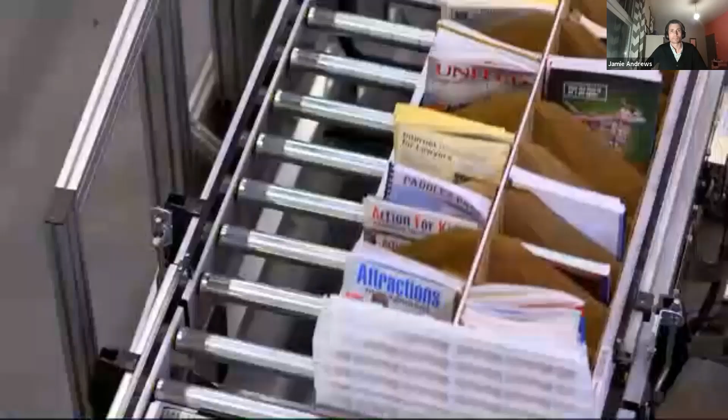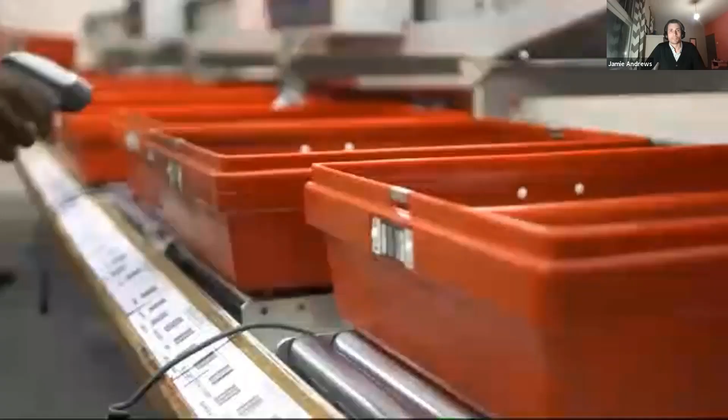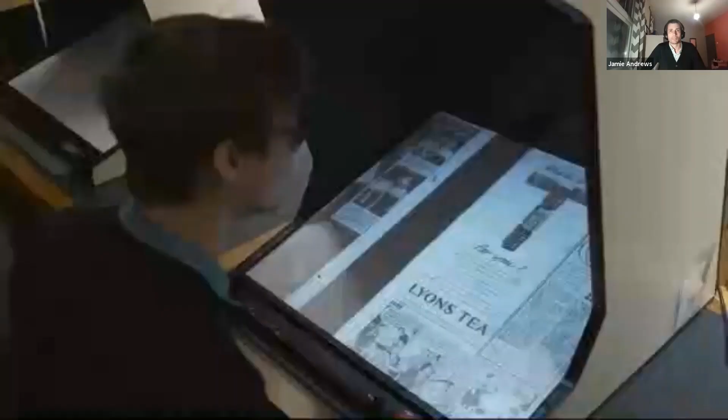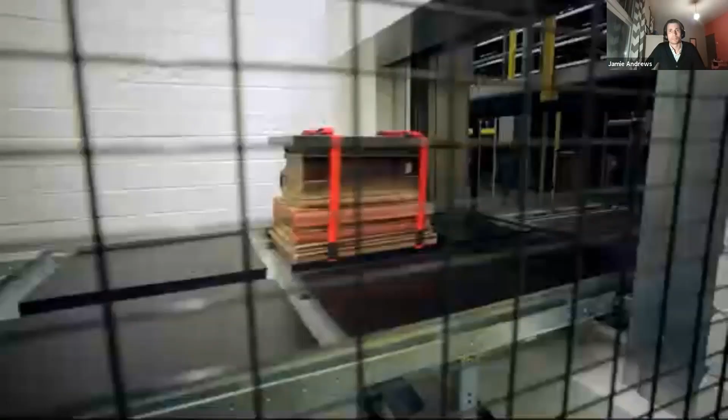Ladies and gentlemen. Ladies and gentlemen, it is a great pleasure to have this opportunity to address this very great and important gathering. I am glad you are enjoying yourself. There is an indefinable, mysterious power that pervades everything. Wonderful discovery in an age of discovery. Let it keep up my foreign language. Well, can you hear? What are they going to play? What are they going to play? What are they going to play? Play. What are they going to play? Isn't it marvelous? Isn't it marvelous? Isn't it marvelous?

The music there, by the way, was by DJ Yoda. It was an original track created from found audio recordings from the British Library Sound Archive, another collection stored at Boston Spa, 5 million recordings dating back to the early dawn of recorded sound, 1877, Thomas Edison's experiments. Everything from 1877 through to today's digital downloads is part of that national audio collection, again mostly stored at Boston Spa.

So that's what we look like, or at least what we will look like again when people are able to be back on our sites. Where did we come from?

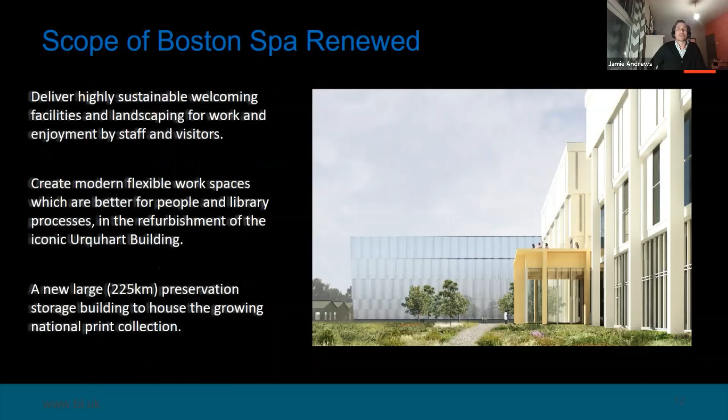But we are still, for the most part, in those original 1940s munitions factory buildings, which were built to be robust, but perhaps not fit for purpose for either people, whether that's our staff or our visitors, or for our collections nowadays. So we are, with a significant injection of funds from central government, working to refresh and renew that site, to make it more welcoming, more open to visitors, to make it a better workspace for our people, and to house that growing national collection that I've mentioned.

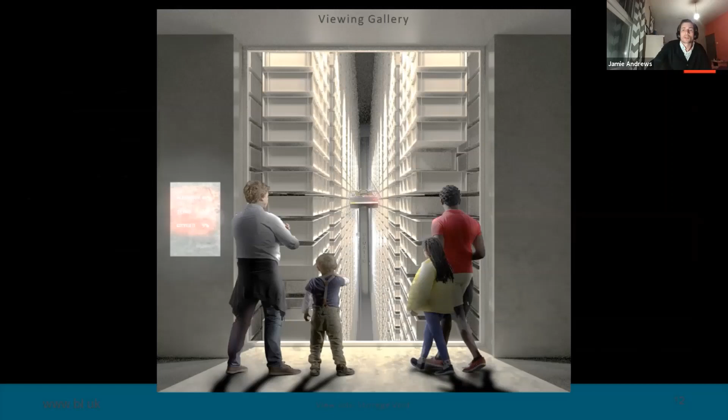As part of that refresh, there's an image there of how even the storage can become a visitor attraction itself. So I'm going to hand over to Rachel.

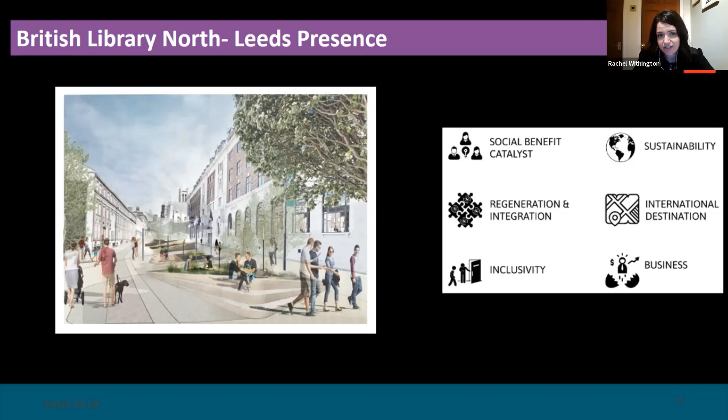And then it's really thinking, how do we translate that vision into a service proposition? I think that's been the main focus of what we've been doing over the last 12 months alongside our programming. This slide really is just to try and show the emerging thoughts of what we've been thinking about. So agnostic of any building, these are the kind of things we would want to do.

But I think given the iconic nature of Temple Works, it's very, very hard to think about a service offer without the building shaping and informing what we might want to do. So the history of the building, which David will obviously detail much better than I ever could in a few moments, it was so innovative for its time, and we want to ensure that that innovation is reflected in whatever we might do.

Multifunctional exhibition and event space, which would enable showcase scale exhibitions, from showcasing of physical treasures to large scale digital exhibitions. Innovation space is the one that I think it doesn't say what it does on the tin.

So what we're trying to do here is build on and complement our regional BIPC offer, supporting businesses through incubation, co-working space, makerspace, so that we can offer support to entrepreneurs at every single stage of their journey, but not only entrepreneurs, support innovation at any stage and from anyone.

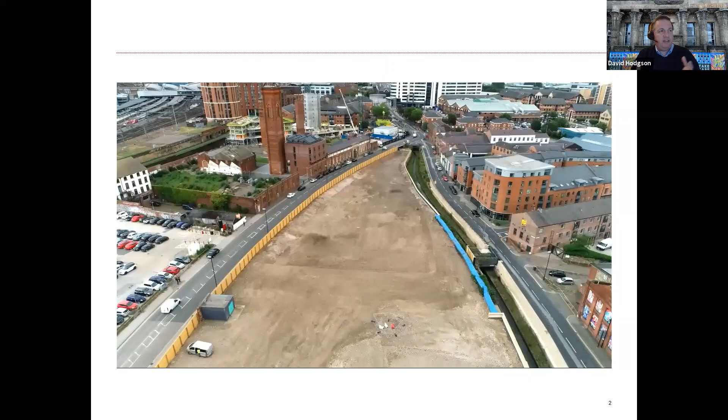So what I wanted to show was the context of Temple within the city centre, and this idea that when we acquired it, we always knew and thought of this location as part of the city centre, but over the years it had been cut off by various mainly transport-based infrastructure, the canal there, the railway, of course, the river, and this place, this side of the station, with everybody leaving the station going to the north of the city had really grown, and this had become sort of forgotten.

So in the front there you see Tower Works, iconic 3 Italianate towers, and behind it Granary Wharf, and then Mustard Wharf that is now coming forward.

This is the counting house. We know the counting house is the building at the front of Temple, and is actually structurally in the best condition. There in the foreground is the former sheep lift, and we'll come to that and explain a bit more about that. And then on the right there is Draper's Yard, or the 1953 building as it was named, and in front of us is 20 Sweet Street.

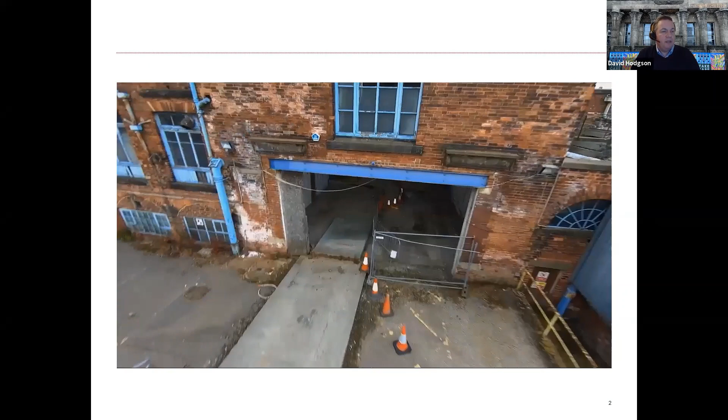I'll hold on to something fixed at this moment as the drone does this, but it flies over that iconic roof that everybody knows, and then we come down into the building. And as you come into the building, you really gain a feel for the kind of scale of what we're talking about here. The quality of the natural light is unrivaled even in modern buildings.

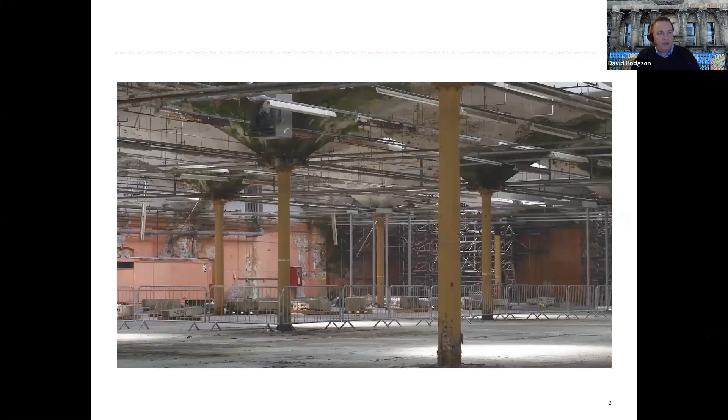That's through these kind of 66 conical glass structures that sit on the roof. And then you can see these columns, obviously far too slender, and we'll come on to why that's causing us a problem. And then you can see there in the foreground some scaffolding around some of the yokes on the building, and then some extensive scaffolding towards the rear. What you can't see is the absolute bird's nest of scaffolding at the front of the building that's holding up the area that collapsed, and we'll come on to why that collapsed.

Going back through the history, that's kind of a setting of the location. That gives you a real feel that sometimes you don't get on the ground as to how close this site and this building is to the station, which I think most people view as the heart of the city centre. One of the reasons why you don't really get that feeling is the complicated route through.

You can walk out of the southern entrance of the train station, put yourself down into Granary Wharf, and it's still not kind of an intuitive, navigable system about how you get through to this area. Part of the charm of the area is if you walk around Round Foundry, you're walking into little squares through cut-throughs and ginnels, and then out into another square, and that's going to be replicated through Tower Works with those towers and the development going on around it.

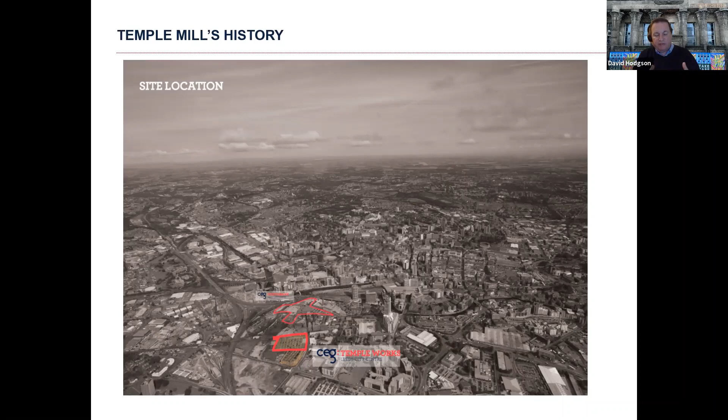We're trying to strike a real balance here on the wider area as to how you can get a real feel for it. It's going to be easy to get to Temple. However, at the same time, we want to contain and retain that element of surprise, and that's what makes this area so special.

Going back through the Temple Works timeline, you can see it was built in 1838 to 1841, designed actually by an engineer called James Combe, and we'll come on to why that was so important. And Joseph Bonomi, who's an Italian architect I believe, worked together on designing it.

Joseph was brought in at the last minute because, surprise, surprise, and apologies, I know there's some engineers on this call - the engineer's design, whilst functional, didn't have that kind of flamboyance that John Marshall was seeking for his new flax mill.

It's the flax mill, and then it moved into the 1930s when that iconic roof was lost in place of a flat roof, and then it was used for the war effort. There's an air raid shelter in the basement, and there was because it was this 80,000 square foot main room with the natural light.

It was used during that time, and then it becomes the Kays catalogue, which a lot of people around Leeds know it as, and that's when the 1953 building was built adjacent to it. Then it traded again to SJS Property Development, which was the Barclay brothers, and then we had the partial collapse in 2008.

And then it's been kind of used for a myriad of different uses. There's been different options to purchase given over the site, and a few false dawns as to its coming back into use.

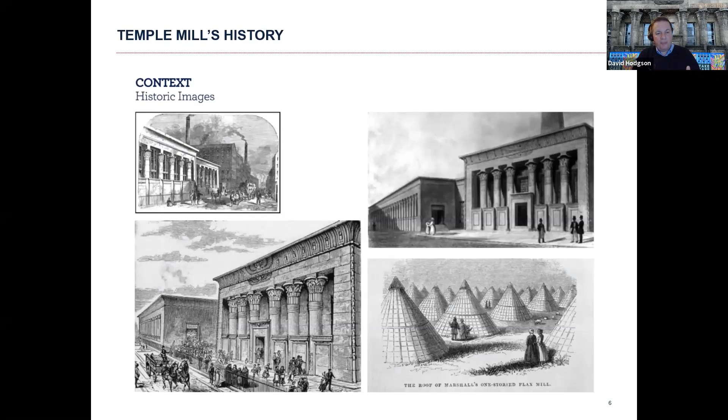We'll come on to how there was a hydraulic lift that was invented to get the sheep onto the roof to graze and look after that grass. The reason they did that was to retain the moisture in the main building - they wanted to get that because that makes the flax much more easy to work with.

What that meant, of course, is that you had engines that had to drive the machinery on the main floor. They were located down in the basement to keep out of that moisture. That was one of the first instances of an engine in the basement driving the machinery on the main floor, with the environment effectively being controlled by what was on the roof. And that has been a recurring theme.

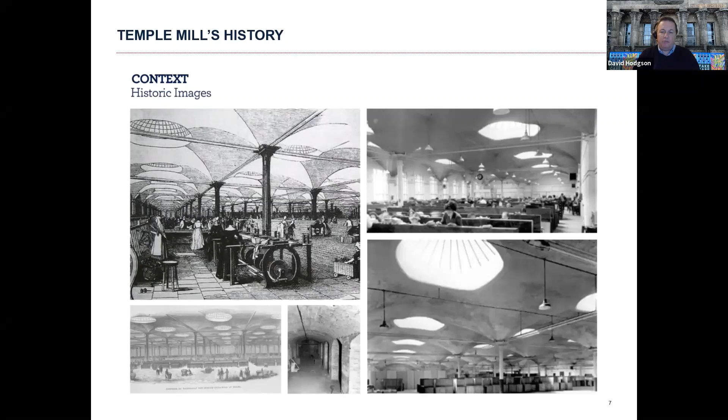We've taken that and thought, well, how can we replace that or reflect that in the modern interpretation of it? But again, you can see the quality of the space and the quality of the natural lighting just gives rise to a number of uses.

I thought the other interesting fact about the history was John Marshall originally started out on his industrial buildings, where he started out on Globe Road, Water Lane there to the north, in 1796, 1791, with warehouses, and then gradually built it along Marshall Street.

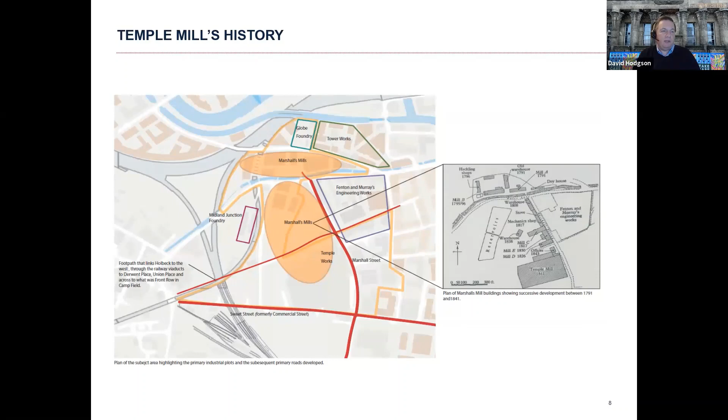That reflection of starting near what would be obviously a very small city centre at that time and working its way southwards to Temple Mill is something that we are again kind of replicating in bringing the area back to life.

Again, some iconic shots of the building - those conical glass structures that sit on the roof, and then the counting house with its Egyptian frontage, modelled on the Temple of Edfu in Egypt, and then Marshall Mill sat alongside it, which has been back in use as a managed office space for some time.

So we've talked a lot about the structural failure of this building, and I think it's well known that unfortunately, just after we acquired the site, we had to prevent access into the building because of major structural failure on the front. More than that, the nature of that failure gives rise to a situation where it's almost impossible to predict when it will go again.

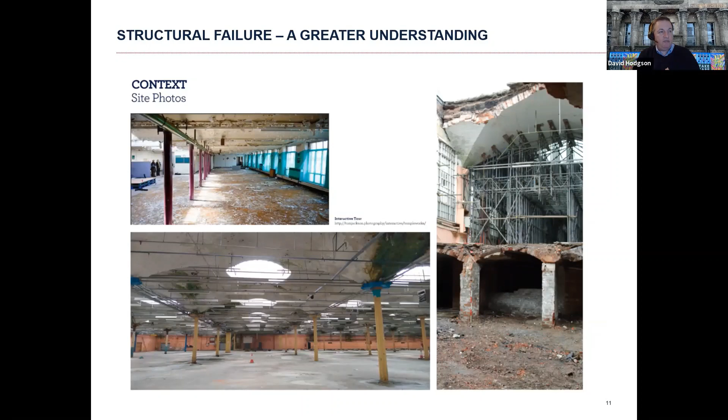We've done our best to shore it up in the short term, but I'll come on to what our plans are going forward. You can see the area of collapse on the front - that's the frontage, with large windows fronting onto Marshall Street. The photo top left is the pavilion, which runs east-west behind the counting house and alongside the main room. That's a two-storey building which we're intending to bring back to life and put a pavilion on top to overlook the roof.

Some examples of where the problem lies. Top left you see the roof structure - that's a cross-section where the collapse happened, but you can see that archway structure. That was the original structural solution to the building.

The intention was the water would land on the building, then run down those angles to the bottom, and then through the 84 cast iron columns that sit in the main room. They were hollow, and it would dissipate into the ground.

In 1930, that roof structure was lost, and they made a flat roof by basically loading it with bricks and clinker into the gaps, and then layers of tarmacadam and concrete on top. That's led to a huge and significant increase in the weight loading on the roof.

We're now about £3.5 to £4 million into understanding this building through surveys. We know more about this building, I would suggest, than the guys that built it. We've come to the conclusion it's pretty much down to that loading on the roof that's causing all the problems elsewhere - you can see the yokes on top of those columns, and one on the right-hand side that's snapped. So that's the issue: a lot of weight being applied onto the building.

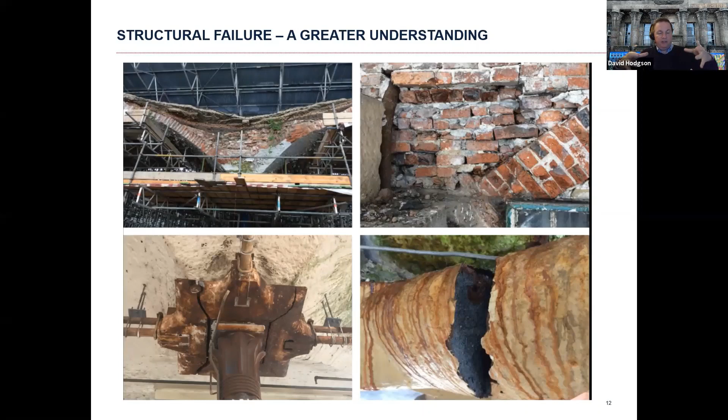We've got cast iron brittle yokes and a tie bar system that run around the building. The tie bars coming out of the four sides of that yoke then connect to another one, and two tie bars run around the perimeter of the building. So you can imagine all the pressure on the building is forcing it outwards, and these tie bars are holding it in at the perimeter.

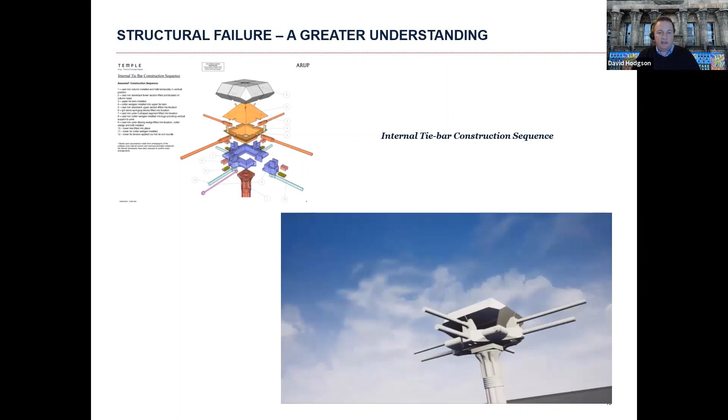So this is an animation of how those yokes fit together. We believe there was only one tie bar system in the original construction, however it collapsed twice during construction, and one of the remedies was to introduce a second tie bar system on the yokes to provide greater stability. That came slightly after the initial one, but you can see the level of design and engineering that went into just one of those yokes.

In 2008, there's a well-documented collapse. A lot of people looking at it, like us when we first started, felt that the building collapsed inwards. I think we spent a lot of time trying to understand how it collapsed inwards when all the force is outwards.

We found some old historical photographs of Marshall Street after the collapse, and the conclusion we've come to, as you can see on that model, is that one of the two perimeter tie bars gave way at the frontage. It was over a long-term freeze-thaw action, not that particular night - a lot of people were under the misapprehension it was freezing cold that night, but it wasn't.

And what happened is there was so much force in the building with the extra weight on the roof that this catapulted part of the facade across Marshall Street, and then the tie bar around the outside caught it and pulled it back inwards. So that's why it looks like it collapsed inwards, but in actual fact the first projection was outwards.

Which is why if you go down there now, there's green nets on the outside of the building at the top of the columns, and that's in the instance of a further collapse - that reflects the fact that the first act of force will be outwards.

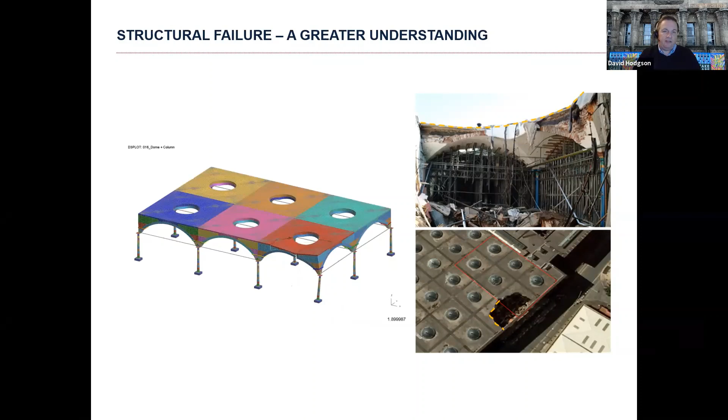That's to capture those bits on the top of the column should that occur. And that's a bit more understanding of the 2008 collapse. So the lower yoke fractured, and it all happened obviously simultaneously - there's a sudden release of this elastic tie, projectile masonry flung across Marshall Street, and then it all collapsed back inwards on itself.

We've modelled that. We've got a much greater understanding now of why that happened, and that's led to a lot of our conclusions. Because we haven't been able to get into the building, we've had to do a lot of this work through drone footage, through robots - Arup and Christian Surveying have both worked together to build robots that go into the building. We've got hours and hours of drone footage on the outside of the building, and we've got sensors set up all around the building that monitor even the slightest of movement.

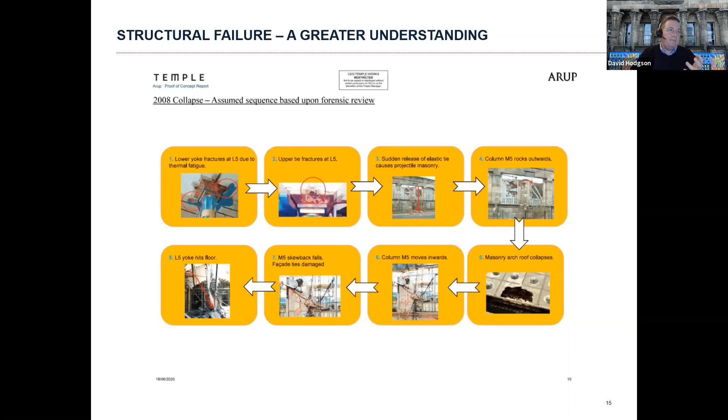And there's a statistic - we've now got over a year's worth of data. This building is moving around 25 millimeters every 24 hours, give or take on average, which it can only stomach for a limited period of time because of that brittle nature of the tie bar system. So it's doing it at the moment, and that's the biggest failing I think of this building - it's not the design, it's the materials that were made available to them at the time.

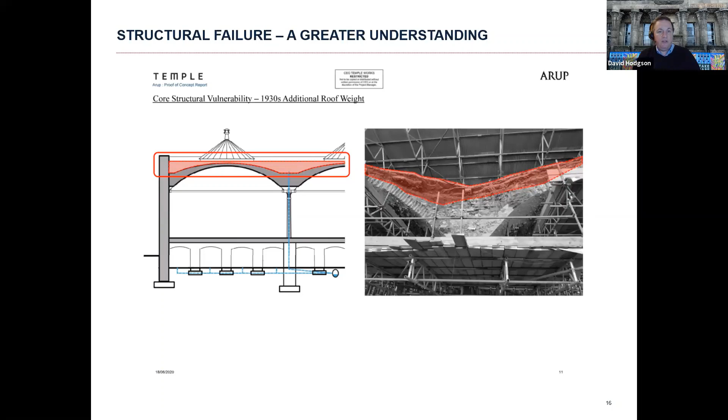So I've got a couple of slides here just to flick through the main issues. As I say, one of the biggest things is this core structural vulnerability given the 1930s additional weight on the roof, and you can see there again that cross section of where that weight's coming from.

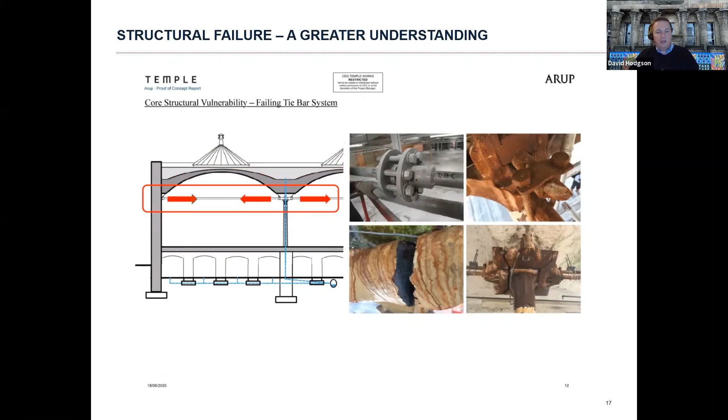This then gives rise to a failing tie bar system - it's this brittle material. Again, there's a couple more examples there of where it's just sheared, and that's putting forces in all directions. And what's very difficult with this building is that should one tie bar go or one yoke go internally, the building can to a certain degree stomach that. What we can't predict is which way the force will then redirect itself. So hence we've got temporary structural works being designed.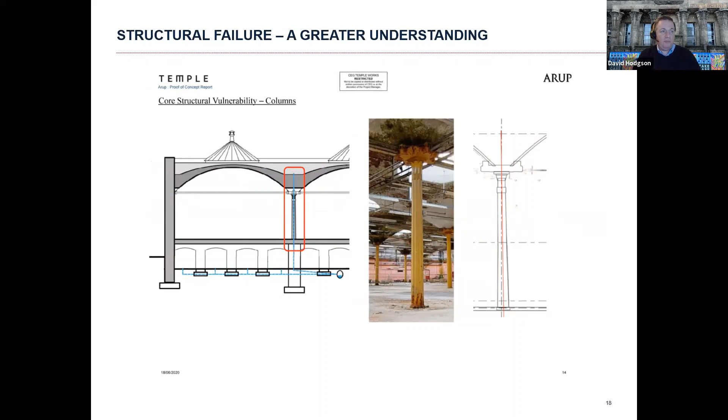These columns, as I mentioned, are very narrow. They used to have water running through the middle of them, so there's obviously corrosion from the inside of these columns as well. And then all of this is giving rise to a lot of pressure on the perimeter walls.

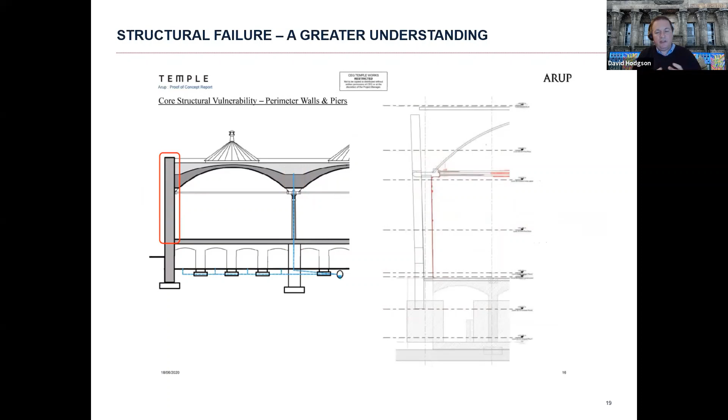And the other big issue that we've got is we can see the yokes in the middle of the building. Where we can't see the yokes are where they're set into the perimeter walls. And there's, I'm not sure, 18, 20, I think, of these yokes sat in the perimeter wall that we need to get access into the building to do, which we can't because of the stability issues. So that's the reason why we're having to pick our way through the building very slowly.

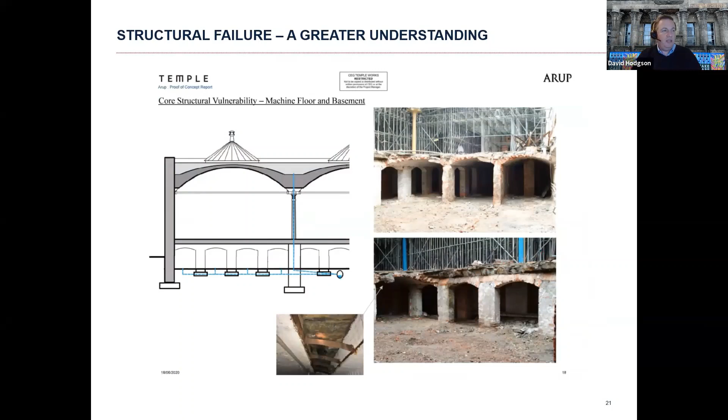And then you've got a basement that's actually larger than the main mill, runs through under the entire building and further than that. And that again is built on poor foundations, poor quality ground.

So given all that information, we pulled together an option analysis of where we thought the best option was, and you can see there's various different solutions for dealing with the structural issues - through an exoskeleton, through an internal skeleton, through buttressing, through a whole variety of things. And one thing we've got to always bear in mind is the grade 1 listed status of this building is in part reflective of that quality of the main mill and the light and the space, and we want to retain that wherever possible.

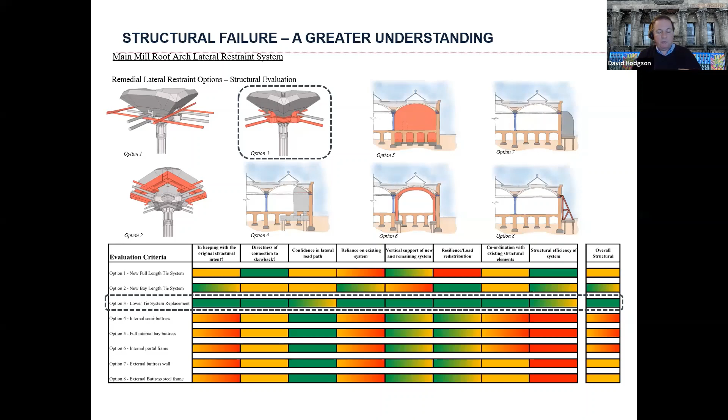So in all honesty, three or four years of work later, £3 or £4 million spent, and we've come to the conclusion that what Marshall did 200 years ago was probably right. But what he didn't have, as I say, was the right materials and the right construction techniques available to him at the time.

So our solution is really a kind of lower tie bar replacement with modern materials that flex and move and reflect the nature of the building. Now, we can't get in to finally establish that until we've done a lot of what we're calling temporary stabilisation works, which we're hoping to start on site towards the end of this year.

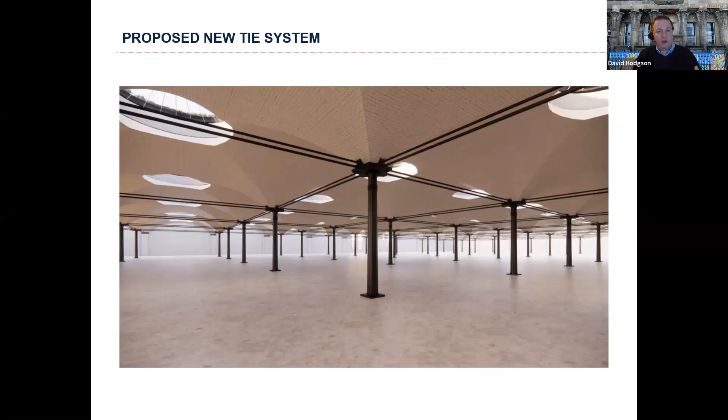There's a year's worth of work there, and it's pretty much not much more than extensive scaffolding internally. However, it has to be done sequentially. You can't start in four corners and work your way to the middle. You have to work through bay by bay, which is why it'll take time. But we're hoping that having done that, we can recreate the space in the building.

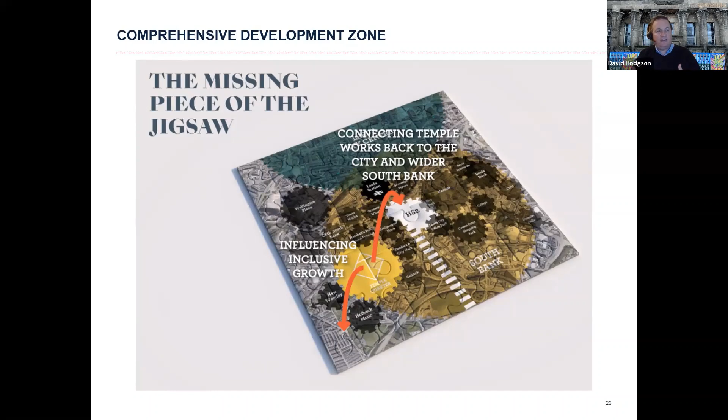So on a wider aspect, the other reason for acquiring Temple is we've worked very closely with Leeds since acquisition to really see how we can make Temple not just the centrepiece for this area of the city centre, but how we can then take it further and really influence inclusive growth through the communities that have been cut off through the M621 delivery.

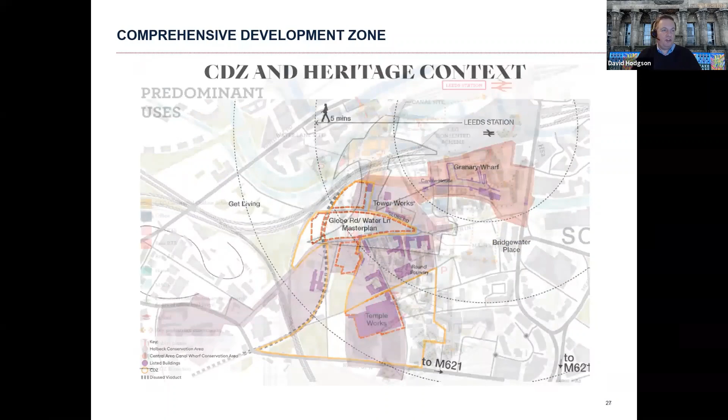So this kind of physical connections back, but also social and economic connections back into the city centre, and how we can use this building and obviously British Library's interest and hopeful future occupancy as a real catalyst to make that happen. So this is just one example of hundreds of exercises that we've done to build up a much greater understanding of the area, how people and traffic and community and everybody else use the area, how they could use the area going forward, what the constraints are, what the opportunities are. And then we've kind of developed a master plan off the back of that.

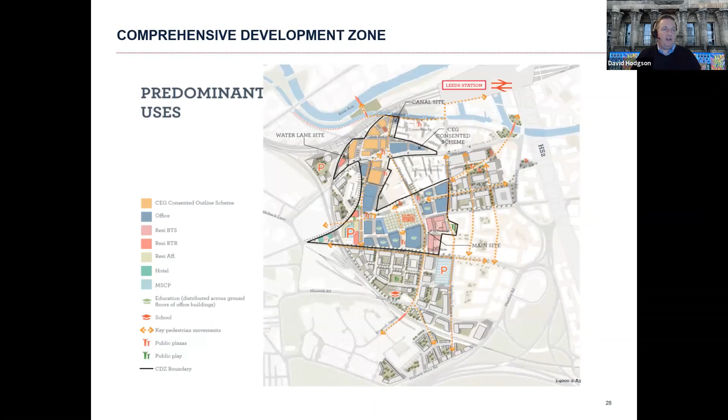That's just really a massing exercise. That doesn't really reflect anything. But we've got an opportunity here for around 3 to 4 million square foot of development that really puts the Temple works as the centrepiece.

And then we've started, as I said at the beginning, really looking at, do we create massive vistas down to Temple? Do we create a series of linked squares and public realm? Or probably the answer, do we do a mixture of all things? And how do we access and make this building much more accessible on all sides?

So these are some of the ideas we've got put into CGIs. Again, these are just very in-principle ideas. I think Leeds have always seen the space outside Temple as public realm, setting a high quality environment to really understand and appreciate that building. And then with development around it, creating new linkways, creating new ground floor uses, new activity, and really kind of this being a new target for the wider area of the city.

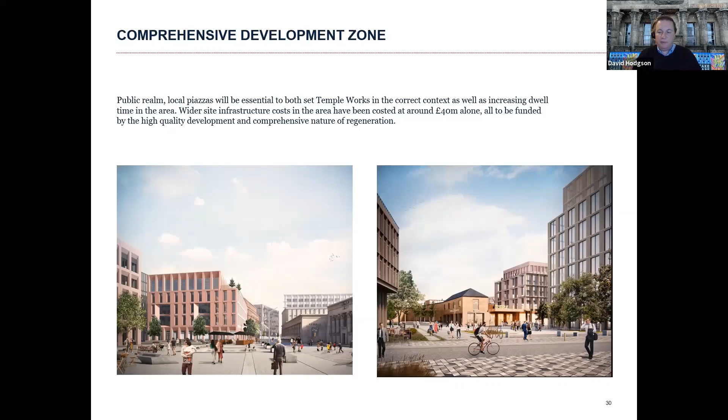The CGI on the right hand side, there's the old schoolhouse, which believe it or not is actually older than the main Temple building itself. That sits, you can go down and see that off Bath Road at the moment, and Derwent Place that runs alongside it. And this was a real kind of community down here. Marshall did what Titus Salt did in Bradford, really, with the schoolhouse there, with terraced housing all around it, with the workers in the middle, with retail in the basement of Temple. There's a massive wild history of the place.

If you sit in the courtyard at the moment around the back of Temple, the levels have been built up and the levels have been kind of messed around with to try and achieve access. There's actually quite a big level difference moving north-south throughout Temple. And in order to gain access into the main room, the levels have been built up at the back.

So our thinking at the moment is to reduce those levels back down, expose that entire frontage of the building and create, again, a new high quality public realm that will then lead in and link to Marshall's Mill, lead further back to Beck Court, which is the building fronting Water Lane, which we control, over a listed bridge, dating back to 1860, that goes across Holbeck, and then a link back through Tower Works, Granary Wharf, and back into the station. So a real clear, visible route through the area.

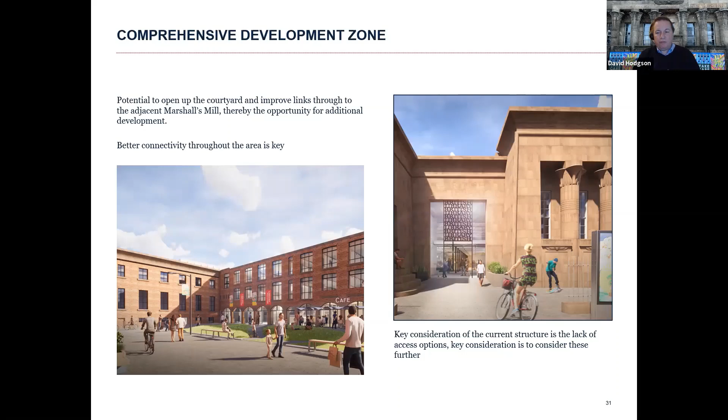And again, just kind of interestingly, one thing that hadn't really struck me until we bought the building was the lack of frontage, the lack of access that the building has. A lot of that was down to, we believe, industrial espionage at the time, and trying to kind of control things leaving the building and control people being able to get into the building and see into the building.

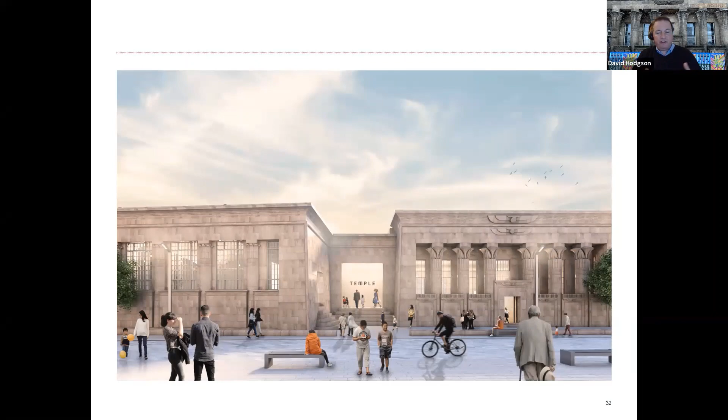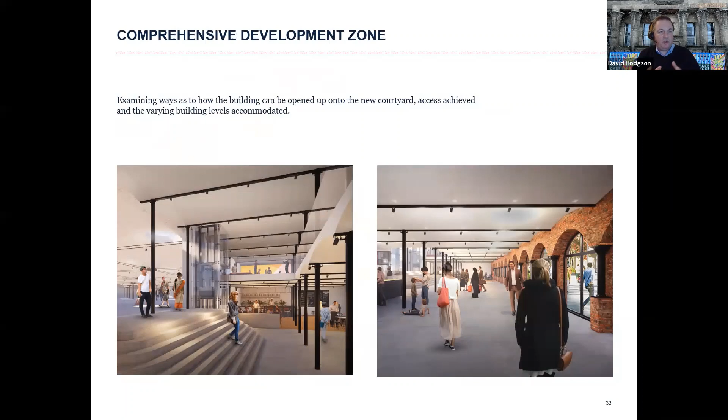Trying to create new entrances and new ways of moving throughout the building without damaging or compromising that grade 1 status. Again, that really shows you how we're intending to use the levels internally to create an access point, and then up into the main room on the left-hand side.

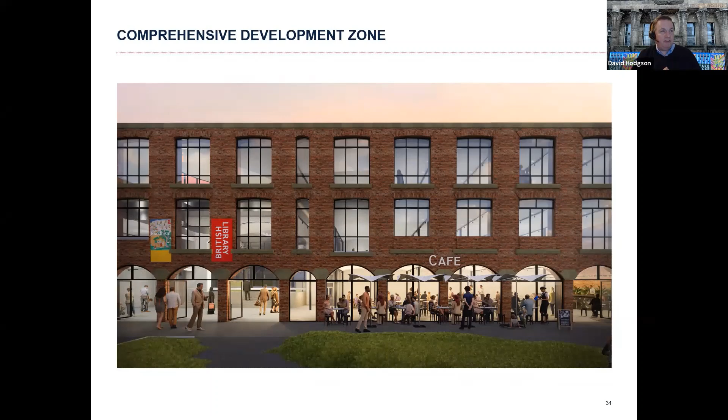Coming back to that courtyard, incredibly important public realm. That frontage down the back, which very few people can see, is not equally as impressive, but is as impressive as anywhere else on the building. That'll be a fantastic space.

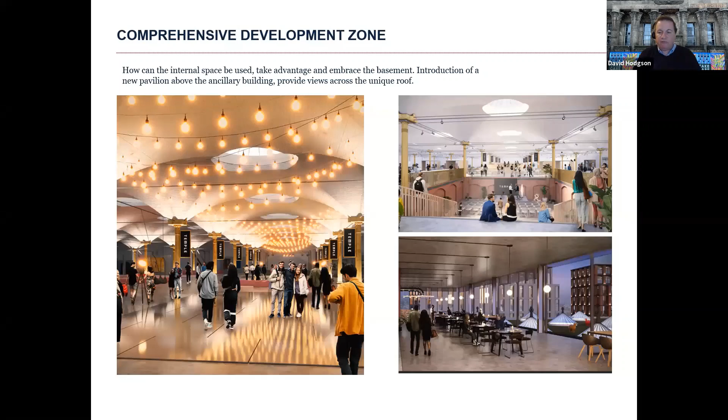I thought I'd put a little bit in because there's activity going on site. Draper's Yard, formerly known as the 1953 building that sits alongside Temple, we acquired just over a year ago. I actually hoped that today I could announce some big plans for that, but just keep an eye out for a couple of weeks' time - we've got a quite big announcement coming about Draper's Yard.

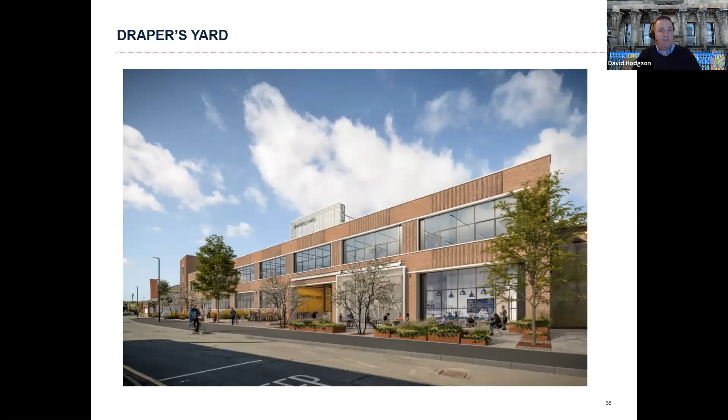We're on site at the moment doing the soft strip internal demolition. We're going to keep the frame, keep the brickwork, refurbish the building and bring it forward as a really high quality grade A space in Leeds. It's unique - it offers a nearly 40,000 square foot floor plate, which gives us the opportunity to put space out on the roof as well.

That has the same issues as Temple, in that there's a lot of roof lights that allow light into the first floor, but not so much into the ground floor. So we're going to try and punch through into the ground floor and create a high quality space down there as well. We've got some big plans for that.

As of about 6 weeks ago, we also acquired 20 Sweet Street, which sits behind Draper's Yard and has a mural by Thubron on there, and we're talking to various organisations now about how we can retain that. That gives us the opportunity to build out backwards, and that's another boundary of the building itself that we now control, which leads to a more accessible and easier long-term solution to sorting out the building.

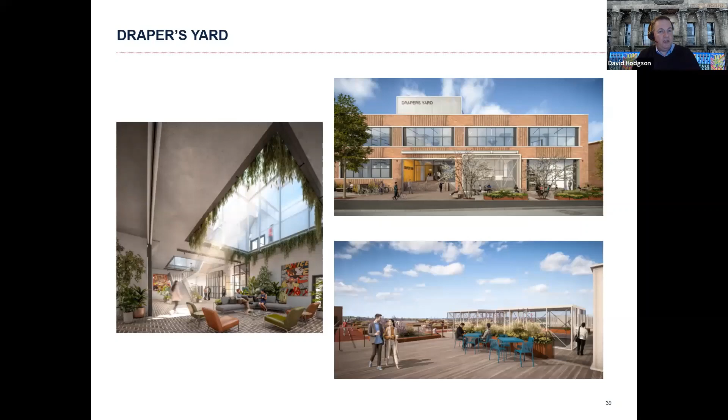So that's where I'll stop. I think I'm going to hand back to Martin, I believe, to look at a Q&A session.